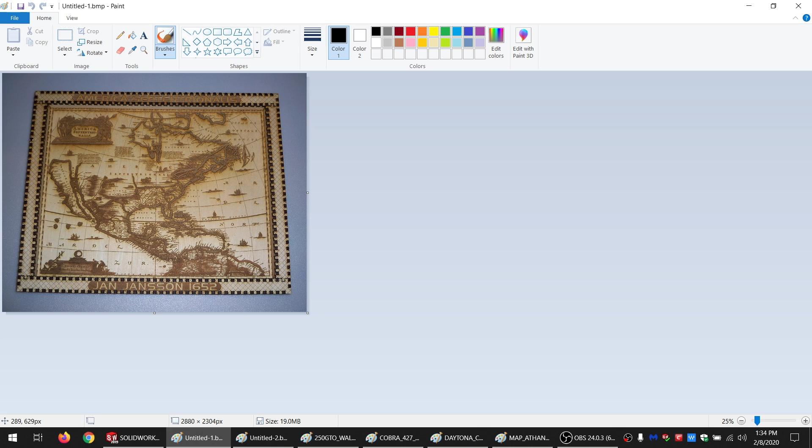Going to do something a little bit different. It's very much the same today. So on a previous video, I designed a picture frame basically, and made several of them. Basically, the idea was that I made a 3D picture frame out of flat pieces that was assembled, and then I engraved something in the middle. So I made 6 of them all together, and 4 of them came out looking just right.

2 of them, however, kind of bowed, and I figured out the reason for that is the centerpiece is relatively large. It doesn't get a whole lot of heat, all things considered. The side pieces are relatively small, and like this piece, it's just all heavily heated. And when I measured it, it actually shrunk a little bit because I dehydrated the wood, and the wood gets smaller when you dehydrate it.

Just the little bit it was, since everything was so tight, that was enough to make the thing bow, which is hardly ideal for something you're going to hang against a wall. So I came up with some ways to fix it, went back to the original file, and after I had implemented all of those, the file was absolutely huge. Doing a regen took like over an hour. And sometimes it would even fail to regen.

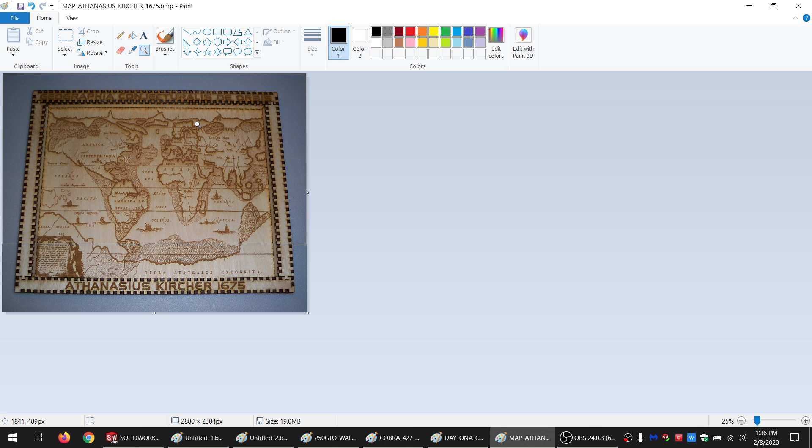It would and not even tell me about it. I'd look and I'd see that, hey, this thing didn't regen. I regen again, and then it regened right. But then I'm not even sure if it regened right. It just kind of looks more right now. Maybe it's still wrong because I wasn't alerted to the problem in the first place.

So basically, I decided there's so many problems with this, and I intend to make a good number of these. And I'm going to have to regen them pretty much every time because that's how wood is. So I just started over. I'm not going to show the process of doing that from start to finish because it was an incredibly long process, and quite frankly, a lot of things I had to try to keep in my head, and talking while I did that just wasn't going to work.

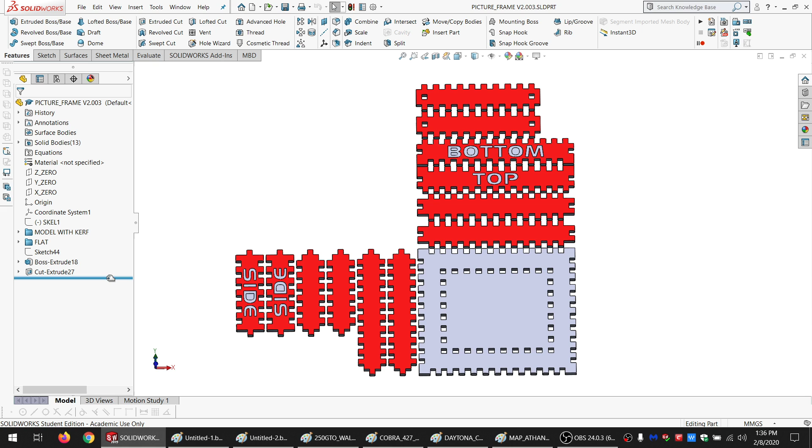So instead, what I'm going to show is I've got the completed part, and I'm going to go through the model tree and show what I did, just to give you an idea. Like, this is the same thing as we did before, but we're doing it in a different way. And that's one of the things that you run into a lot of times in CAD is you might have 5 or 6 different ways of doing something, and sometimes you just gotta choose between 2 of them that are equally good.

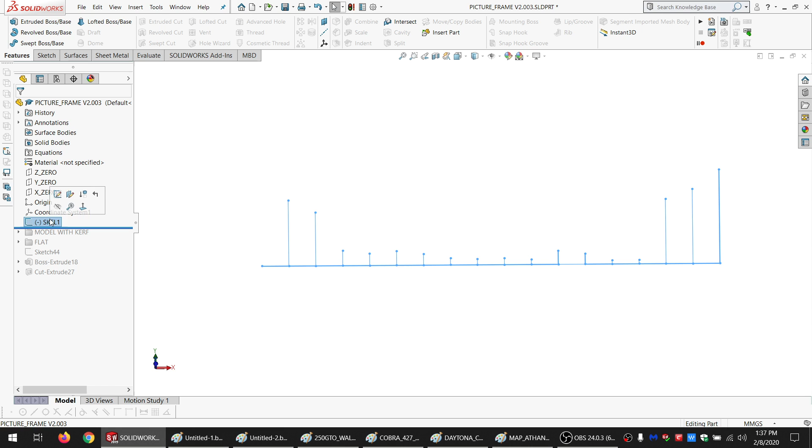Sometimes you got a couple options that are really bad, but they will work, and maybe you resort to them because the other methods are just causing errors for no reason. SolidWorks is my favorite CAD software. It seems to be the most reliable and capable of anything I've tried, but even then, it's far from perfect. So, I'll show you another method, and maybe you'll get an idea out of it anyway.

So the first sketch is SKEL1, basically the same as what we did in the last one. Basically, this is just a bunch of math. So ultimately, it gets us, you know, Y tooth wide. I've got X tooth wide. I've got the total X count teeth, same as before. So this isn't actually used to generate geometry directly. Basically, it's just used so I can say this feature that I'm making should be equal to this, or this divided by this, or something like that.

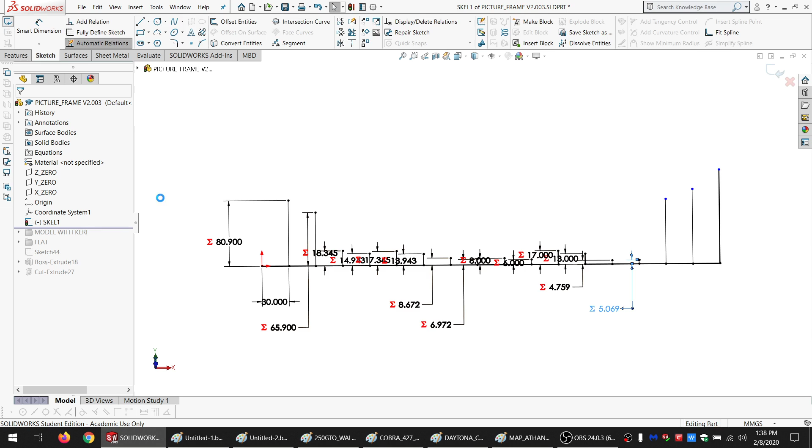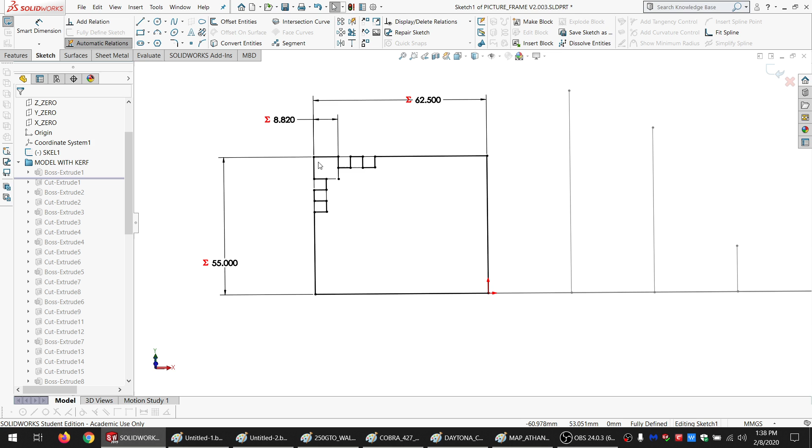And let me roll back here. So I went ahead and started with basically just making 1/4, the top left quarter of the back plate. And so I drew that up, and I already knew that this was going to be 2 times the material thickness, and then there was going to be 5 spots worth of material thickness width. So 1, 2, 3, 4, 5, 1, 2, 3, 4, 5. And so I went ahead and made the teeth also when I was doing that.

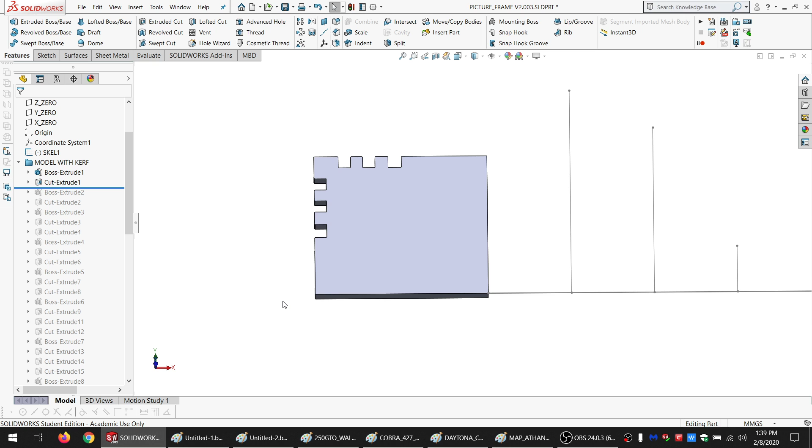And then these two teeth are made by this sketch, and that is based on the tooth thicknesses I generated here. So the first 5 width is where the border is going to be, so that's all done in just being equal to material thickness. Whereas these are calculated out because it's a longer run, so you don't notice if they're a little bit off because it's divided out amongst a lot of teeth, and that way I'm not restricted to having it a multiple of the material thickness. I can choose the width I actually want and let the number of teeth sort it out for me.

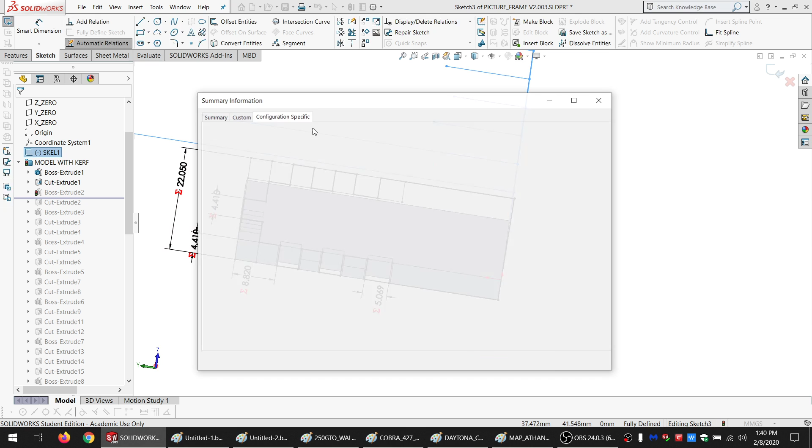And I only made the first tooth in the pattern, so that comes in important. So then I drew up the side one, and you'll notice there's a lot of equations here. And the reason for that is that nothing is really constrained to the geometry of this piece, or this body. It's all based on the original, the formulas from here, formulas from here, and there's a couple of constraints just to orient the whole body, but like the size of these teeth and the positioning of them, it's all based

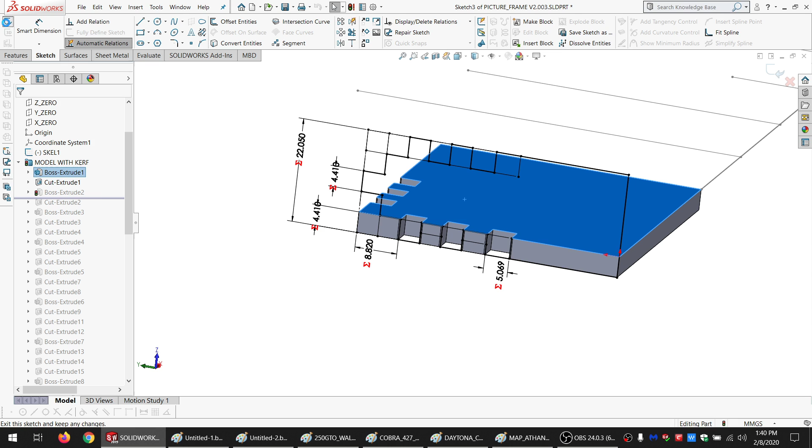right inside this sketch. And the reason I did that is because I don't want it to be dependent on this original part in case something changes. Not a huge deal at this point, but I wanted to get into that habit because it's going to be really important as we get more and more complex going forward. So then this sketch, this is just an extra cut, I believe. Okay, so this is the original just square basic.

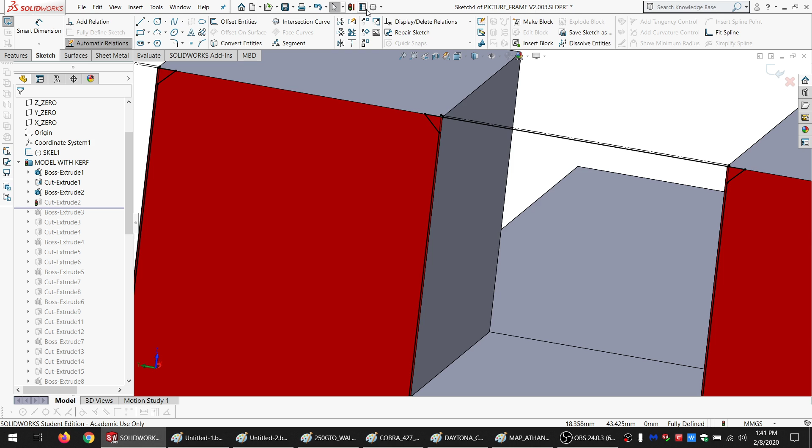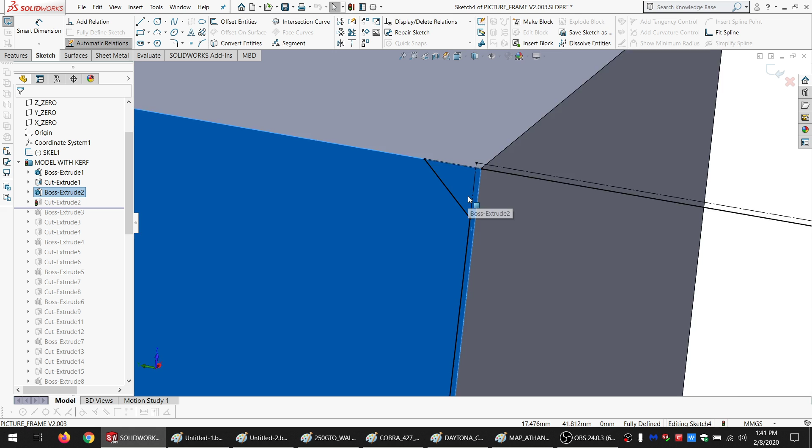And then this, what I did was, first of all, I added something that's called finger side space. So basically, I just wanted to be able to make the openings between the fingers a little bit larger. So again, if there's a little bit of shrink or swell in the wood, it doesn't cause the whole thing to bow. So basically, I made this section here that cuts a little bit off the side of the finger, and while I was at it, I also did the chamfer. And I just did that for all the existing teeth.

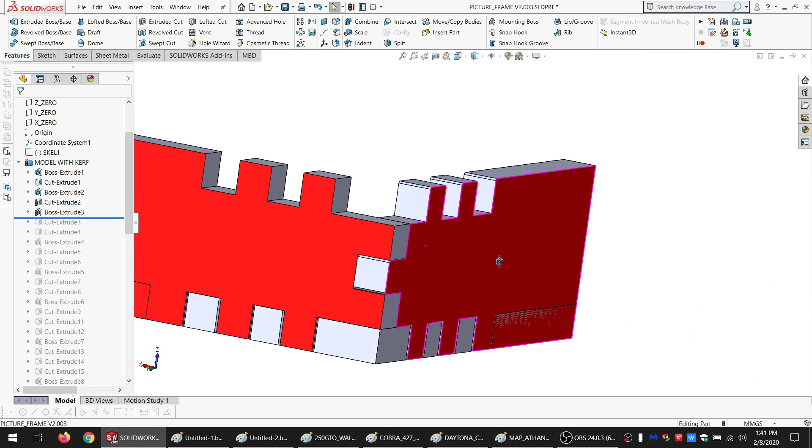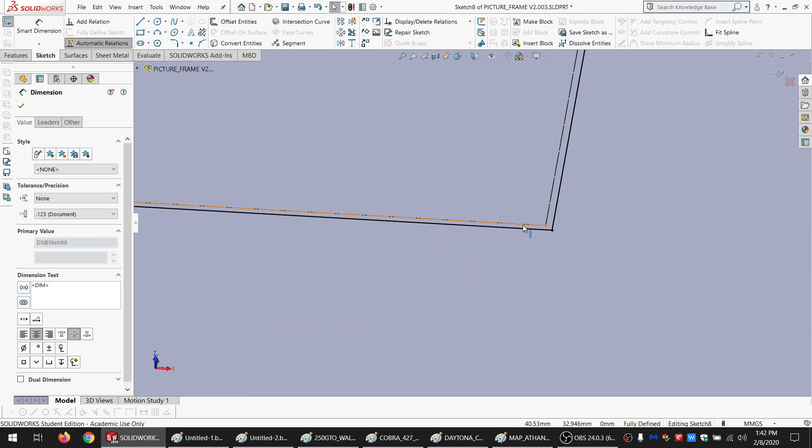And again, I only have the teeth that are material thickness, and then the first tooth that is based on the formula that's not material thickness. And then I do the same thing on the back. I make the back one, and then I add the offset and the chamfer. And let's see. Then here, let me hide these. I went ahead and made the first square, where the inside square here is where the square would be in theory. And then I offset it by,

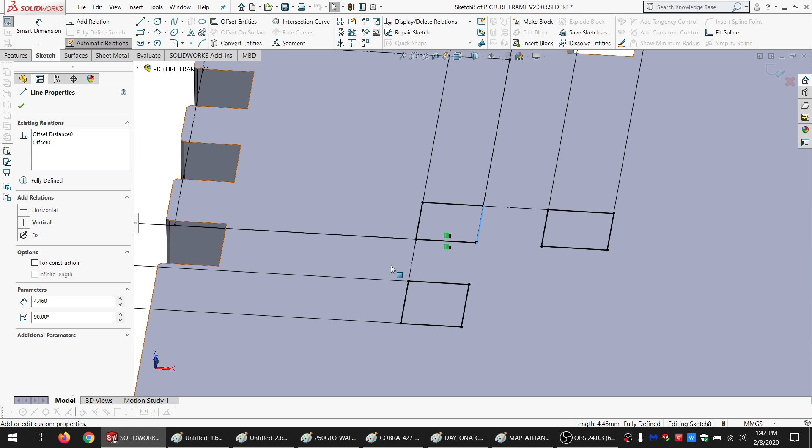again, by this finger side space, which is actually that divided by 4, because it's on either side, so that's divided by 2. And then that's applied not only to this, but also to the thing going into it. So it needs to be divided by 4. And every time I use this finger side space, I divide it by 4. So it's 0.025 in this case, but if I change it later, it'll adjust. And again, these are all located based on the math, as opposed to geometry. I think this I did a coincident on, and that was it. Everything else was based on math right here in the sketch.

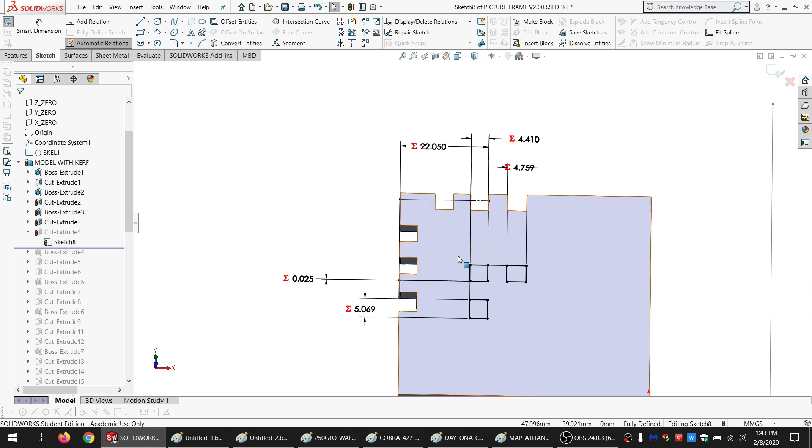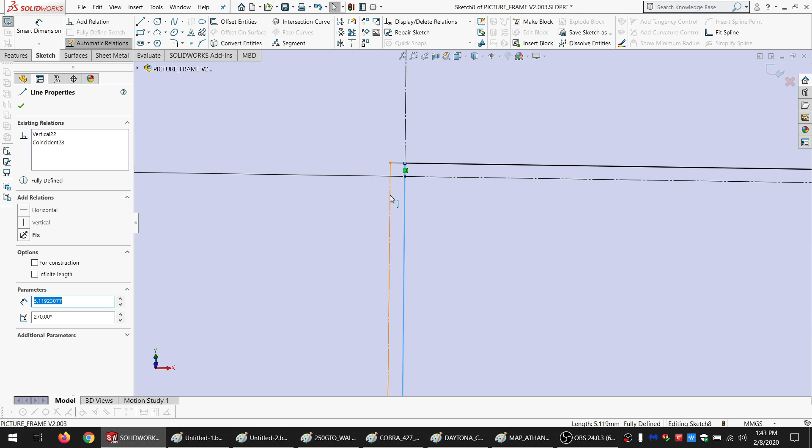So got this finger, then I went ahead and offset it. But you see in this one, since the piece of wood is going this way, I'm not too concerned about it expanding this way. I mean, it might, but if it does, that just makes it tighter in the hole. It doesn't cause it to warp the whole product. So the final piece that I made doesn't cut off this part, but it does cut off this section.

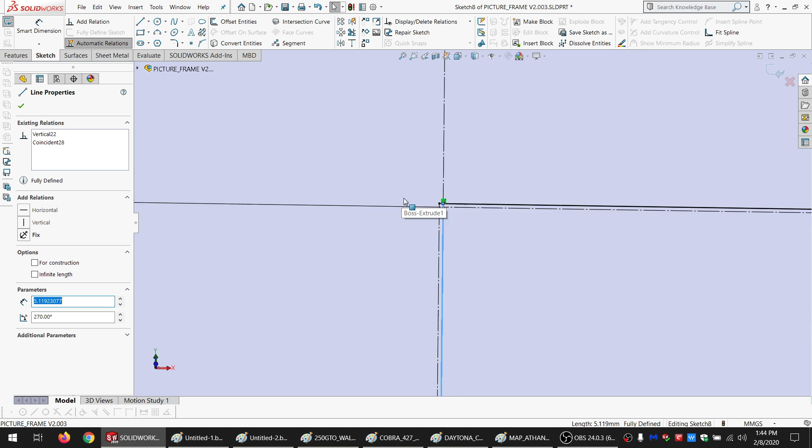And one other note is that on all these, I'm selecting the original rectangle, and then I'm offsetting it. And by doing that, I can constrain to it, and if something changes radically in size, it doesn't flip and go, oh, you want it to be this far away. Well, if it's down here, it's also this far away. By offsetting it, it's coincident to that. That's outside of it. And SolidWorks, when it regenerates, goes, okay, that's outside of it, it's coincident to that, and it doesn't end up backwards, which happens sometimes. It's not very common, but it does happen.

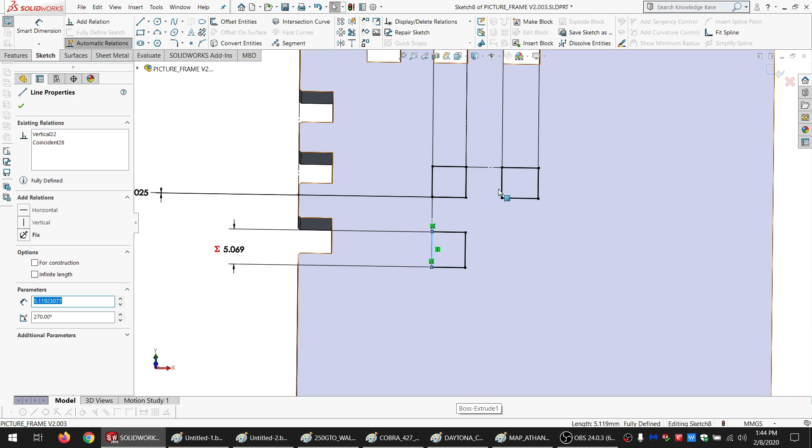And when you're dealing with things this small, you're likely not to notice it until you try to put it together, and then you've got to track down what happened because it's not going together. And basically the same deal in this direction, just a different formula, because this is the Y tooth width, this is the X tooth width, and then this is equal to that. Yeah, so, and also I just made the first tooth in the series again.

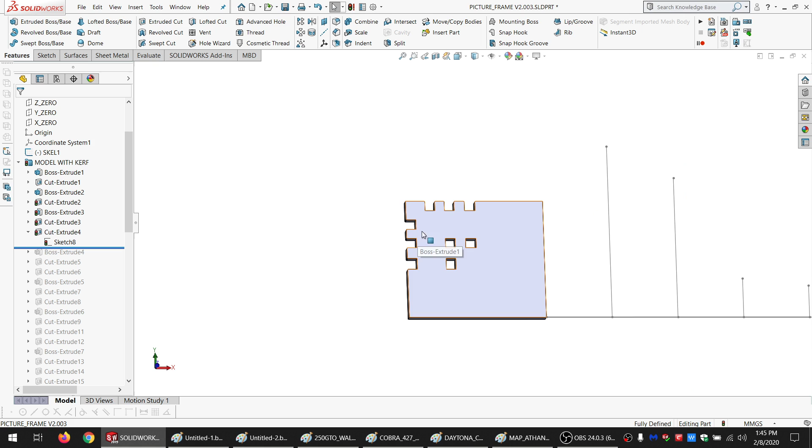And that'll be going throughout. I'm just going to be making the first tooth in the series. And the reason for that is if I was to make this whole pattern right away, then depending on how big it is, I might have an extra 100 faces or 200 faces, depending on how big I tell it to be. And then I've got another 200 faces here.

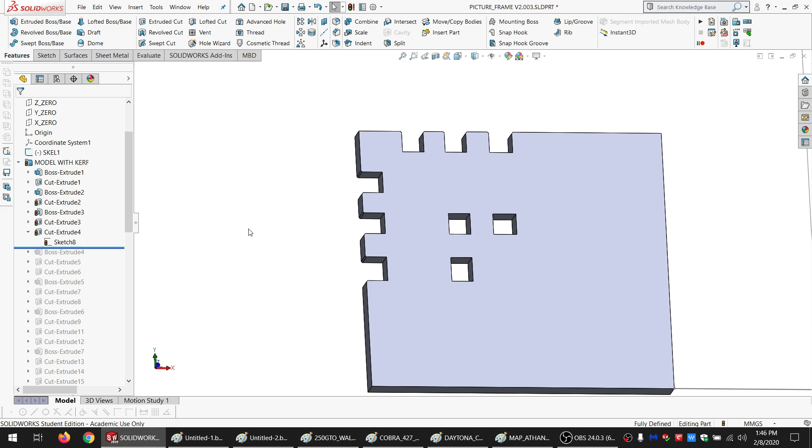So now I'm drawing this in the small size, and this is face, I don't know, 80. But then I regenerate the big size, and now face 80 is like here, and it throws everything for a loop. So basically what I'm drawing is always going to be there no matter what, and I'll worry about the generated stuff that might or might not be there afterwards. So, I'm going to show everything again.

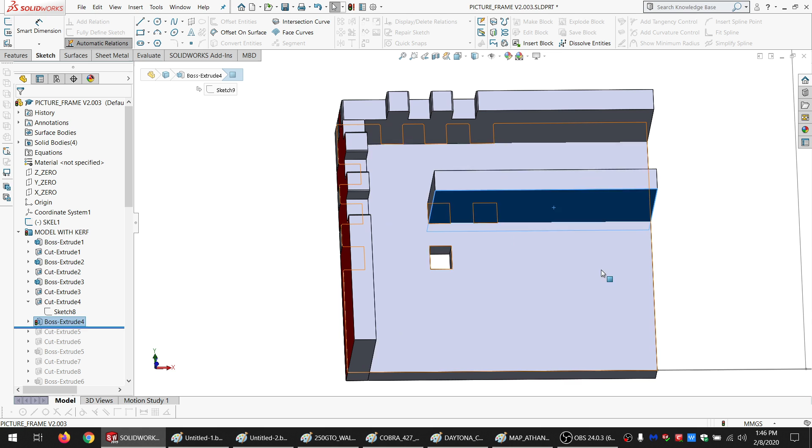All right, so here I just generate the inside border. And again, this was based on just geometry inside the sketch. It's not based on being attached to, say, these holes in here, because those wouldn't be very useful for this anyway, since they're already offset. And then I do a cut, basically for the spot between here and here. I just want to make that first cut. And if I hide this, you see I just get that first cut.

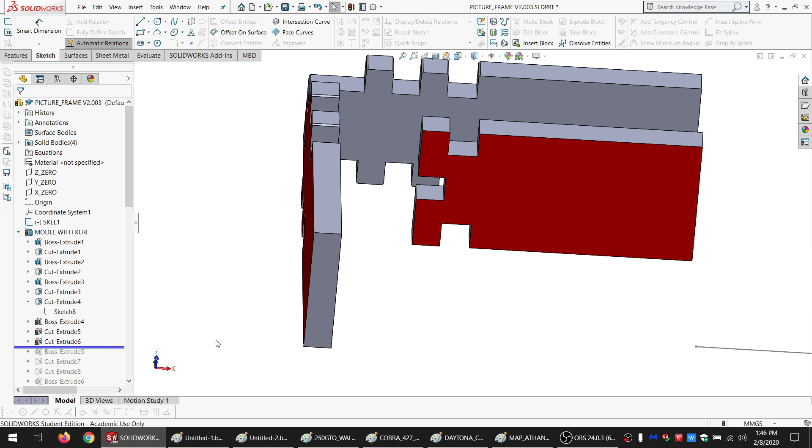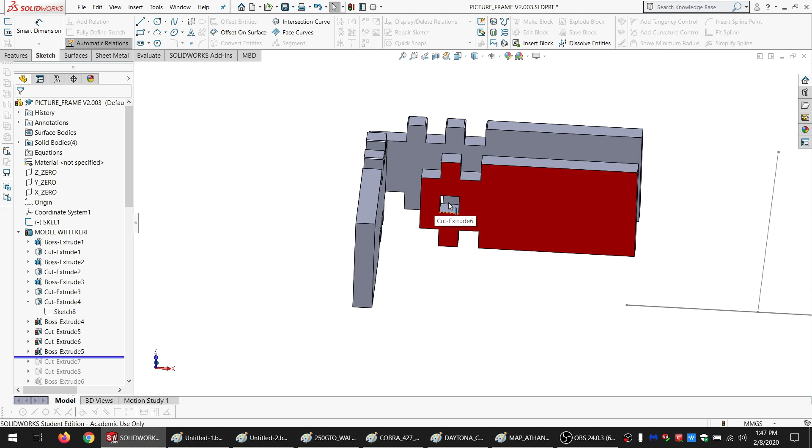And then I also need a cut for where the other piece that is going to be here will notch into it. And then I went ahead and added just a little bit extra material so it's actually going into a closed off hole, which if you can do that without showing it, it's a good idea. Sometimes it's worth doing even if you have to show it, because it makes something a little bit stronger and easier to assemble and all that.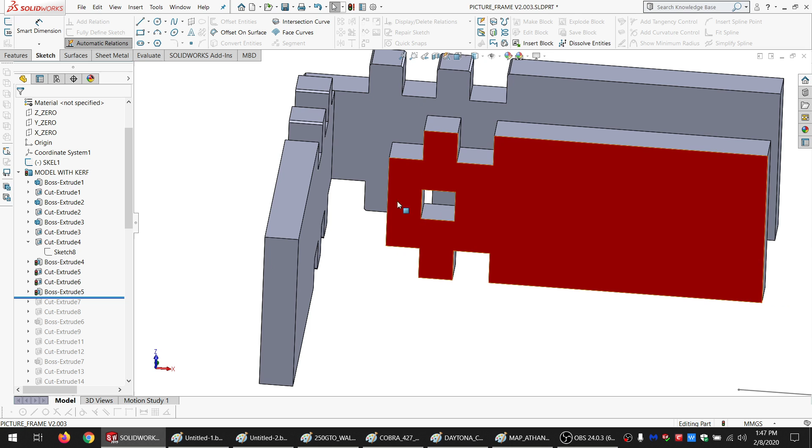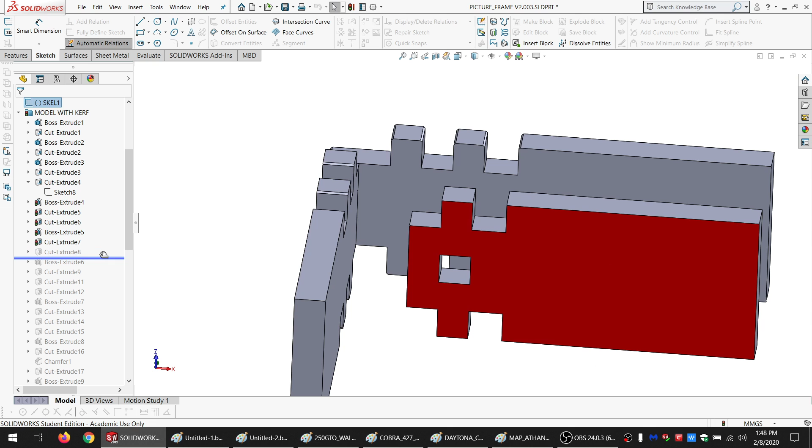In this case, I'm trying to make it look as presentable as possible. And I think in this particular design, having this on all the contact edges and closing in all the fingers would not be ideal. But since this won't be visible, I took the chance to use it. And here, you probably didn't even notice a difference, but I just cut that little bit extra off for the finger side space. And then I went ahead and made the chamfers.

And here I make the piece that's going to interact with that. This is just a rectangle at this point. And so then I cut a bunch of pieces out of it so that it's the basic theoretical shape before all the flourishes are added. And again, I just take little tiny cuts on here, and here, and here, and also here and here. And then I add chamfers.

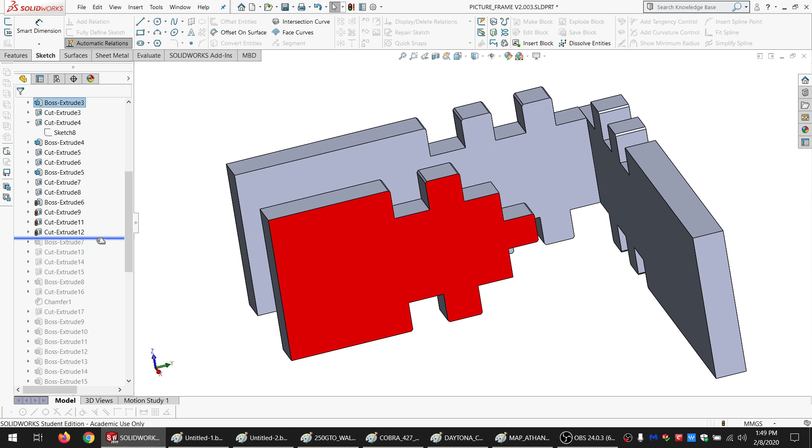Side note, I did the chamfers as a sketch. In this case, you could use the chamfer tool. It probably would have made more sense. I just wasn't thinking that way. Again, you can do things multiple ways, and sometimes the way that just comes to mind maybe isn't the most efficient, but it works. And again, just make a rectangle to get a good basic idea of what the piece is going to be cut out of, basically. And cut all these out.

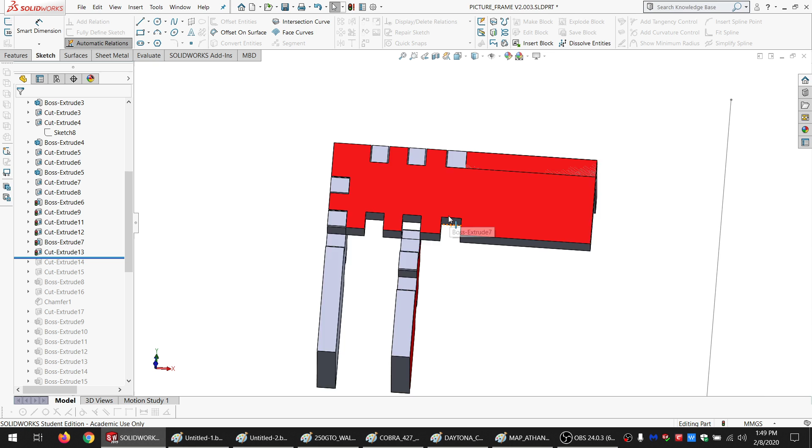So this whole section, these teeth are as wide as the material thickness and as deep. And then the first tooth here, well, the sixth tooth, but this is the first tooth of the pattern that will not be the material width. So my material width is 4.41 millimeters, and this first tooth is 4.759. Which on a small one, you'll get quite a variation like that. You know, we only have a few teeth to work with here.

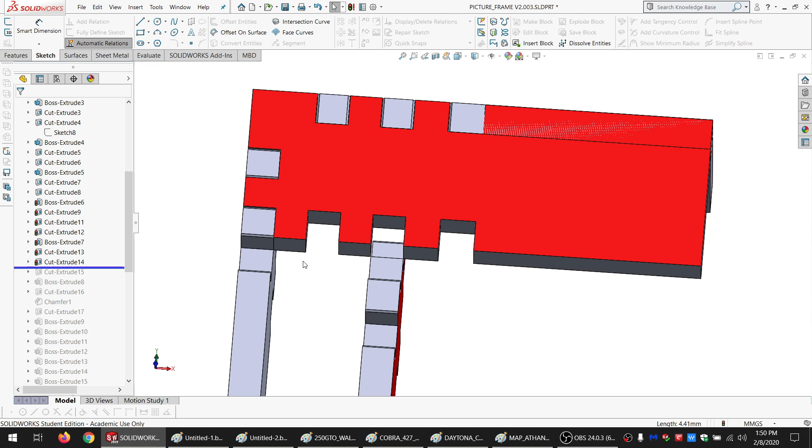When I'm making it larger, you know, it's got 40, 50, 62 teeth, that difference is much smaller. It goes from 4.4 to 4.759, whereas when it's a large size one, it might only go up to 4.5, and you'd be hard pressed to see a difference of 0.1 millimeters, especially in something wood. And let's see, this is just cutting off the extra tooth side distance, and then adding the chamfers.

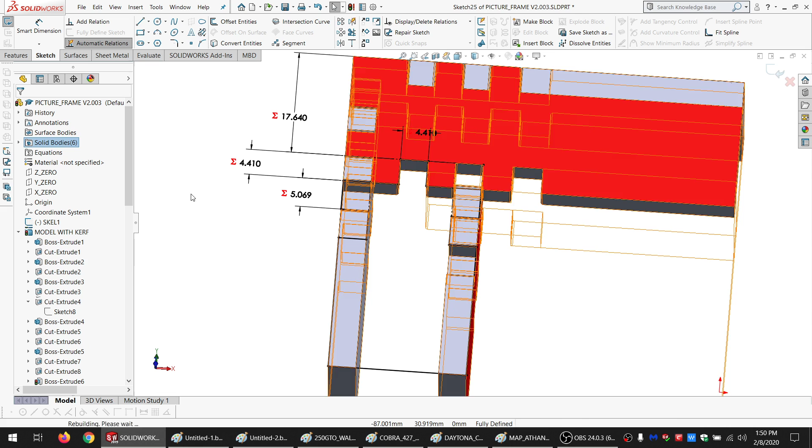And then I make this piece. I believe in this one I went ahead and did a little bit more than just make a rectangle. So if I hide everything else, yeah. So I did a little bit more than just making a rectangle in this piece. I made, you know, the basic design right away.

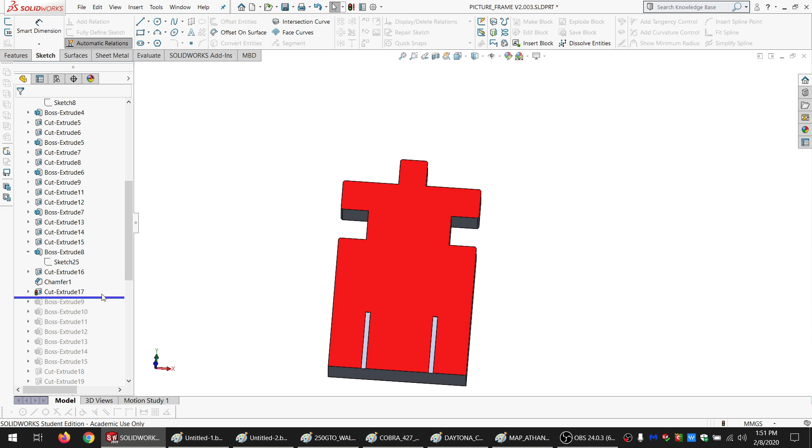And then I offset just a little bit on these. And by this point, I'd realized, oh wait, I can just use the chamfer tool, so I did, and it saves a little bit of time, obviously. And I need to show the rest of this.

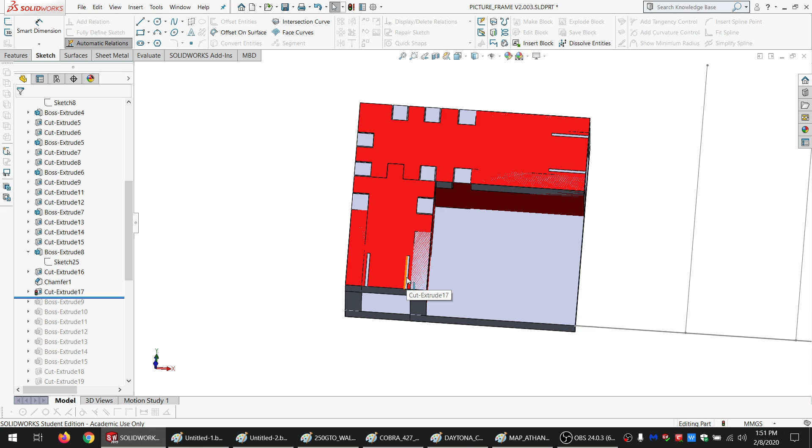So, highlighted in blue, you see 4 rectangles. These are the base of where I'm going to connect the text, which I can't put in yet. Partly because I only have a quarter of the thing, and partly because if I put in the text before the very last step, it's going to add a whole bunch of extra faces, and that's going to cause problems in other features down the line. So I just wanted to put something that I could anchor the text to later.

So what I did is I just put in these. I made a rectangle here, another rectangle here, and I made this equal to the text height that I'm using, which is right in here, text tall. And I also have this text base offset. With some fonts, the bottom of the font will be right touching the line that you draw it on. Sometimes they'll be above, sometimes they'll be below. Most often they're either right on the line or above, though.

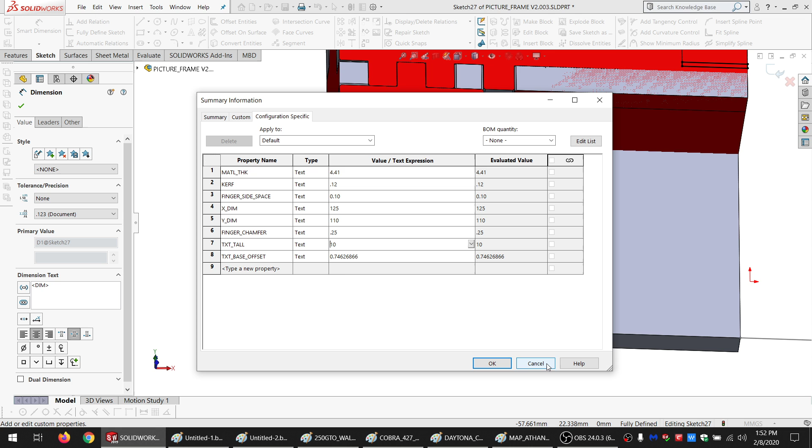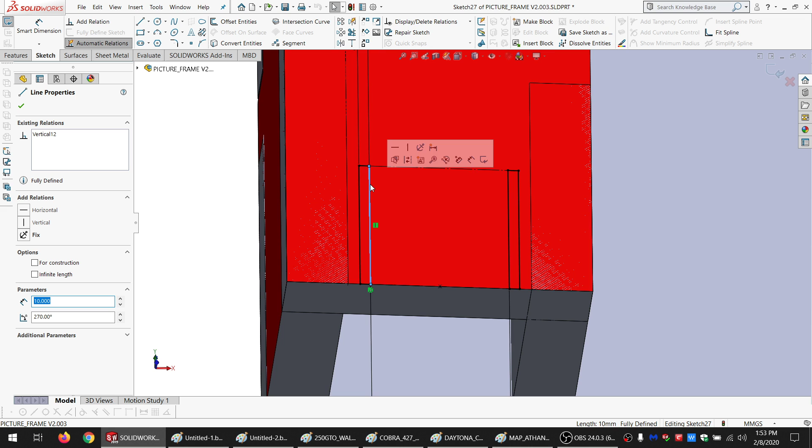The particular font I am using here, at 10 millimeters tall, is this far above the line you draw it on. That changes depending on the height, but I'm using 10 millimeter tall, so it's always that far above. So I made this rectangle as the ideal spot that I want the text to be in, and then I made rectangles to the side, so if I base the text here, the bottom of the text that you'll actually see will be right there. And I did the same thing here.

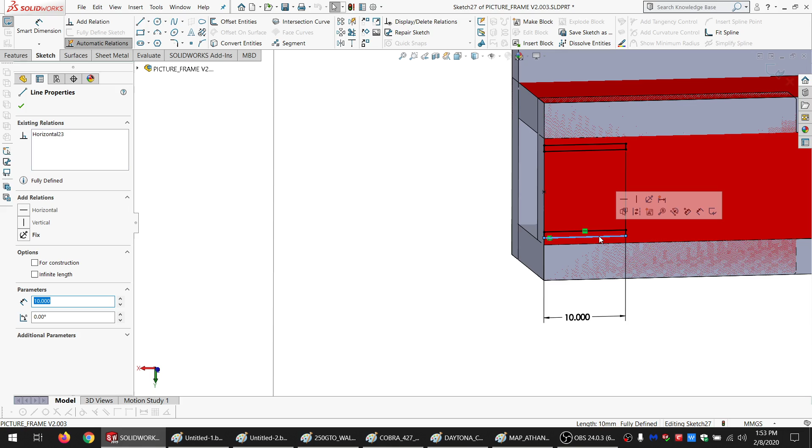If I start writing text using this line, the actual bottom of the text that you see will be on this line, and the top of the text will be on this line. And if I flip this thing upside down and I want to start text here and have this the top of it, I basically just got the same thing that I can work on. So I can base text here, the bottom will be here, the top will be here.

And so yeah, I just put those in. I could have put them in later, but I thought of it at the time, so I did it. Sometimes I do that. Let's see. What's this one do?

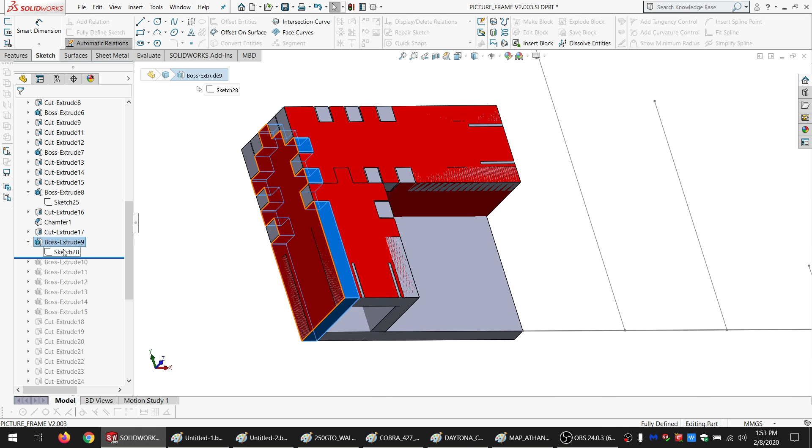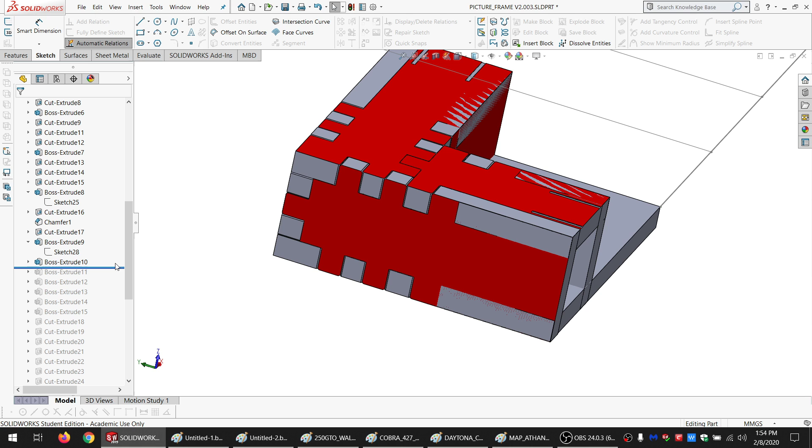All right, so this is actually kerf already. Even though I've got less than a quarter done because I don't even have these teeth, I figure might as well do the kerf offset early on, when there's fewer things to worry about, so there's less for it to have to process. So I did the kerf there, I did it there, and scroll down a few, did it in that piece, on that piece,

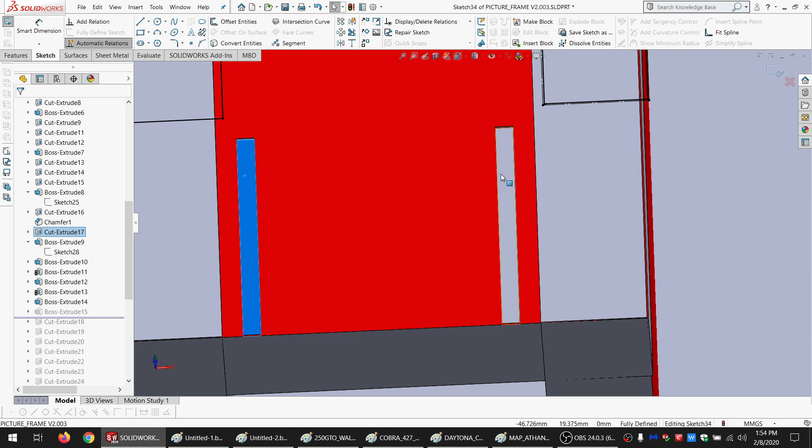and this piece, and then this piece was a little bit more, because all of these I just offset the face, and it was nice and easy. Only difference is that when I did these, after offsetting the face, I also had to do a convert entities on these so that they wouldn't get covered up. On this one, let me hide all the others. Oh, I should have kept that and hidden this.

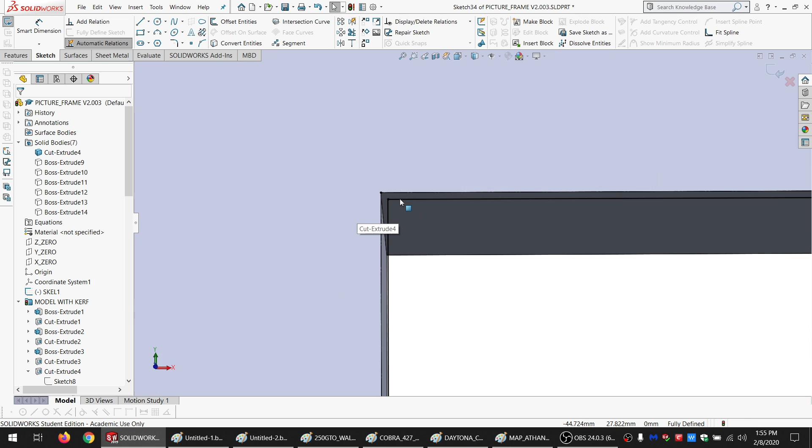All right. So on this one, in addition to doing the offset face, I also had to offset these. So I offset these in, and these are just construction lines. And then I offset the outside out. So basically when I did the extrude boss here, it just completely overwrites the existing piece that had been there. And let me show everything again.

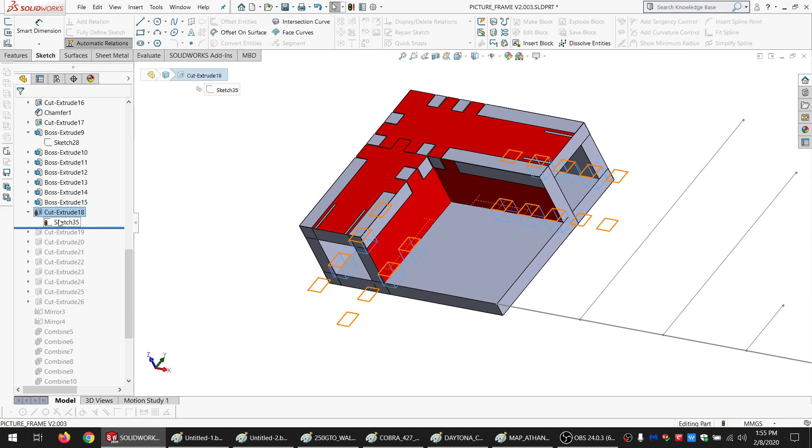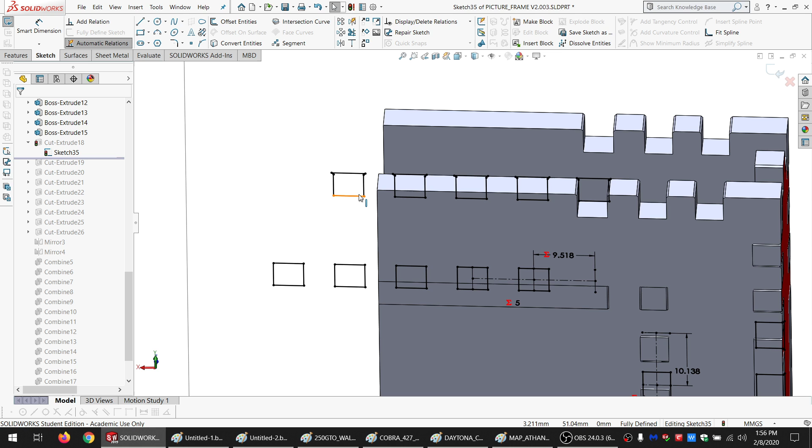So at this point, I'm actually starting to work with the patterns. This is the first place that I'm actually starting to use patterns. We're a good ways down the tree, so anything I do in here isn't going to mess with it. And I'm basically at the end of the process, other than doing the patterns, so I do the patterns here to cut all these teeth going forward, and also this way.

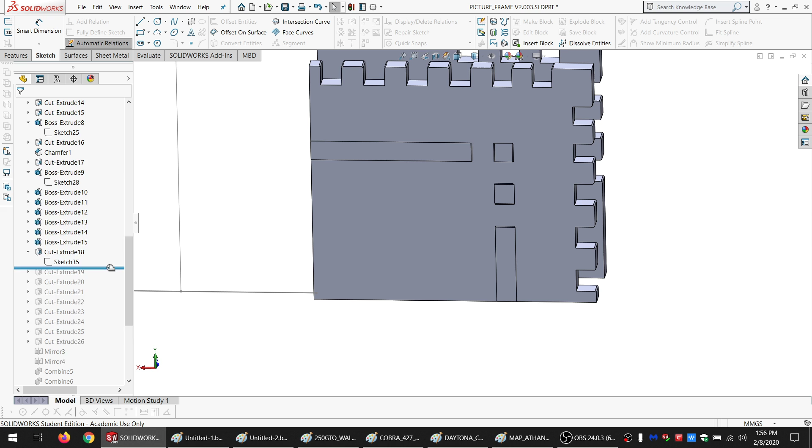So let me show this again. This sketch is basically before I do the tooth cut, and then I've got my teeth cut. And this looks a little bit wrong because it's half a tooth. It'll look right once it's all sorted. It's fine. And let me show everything again.

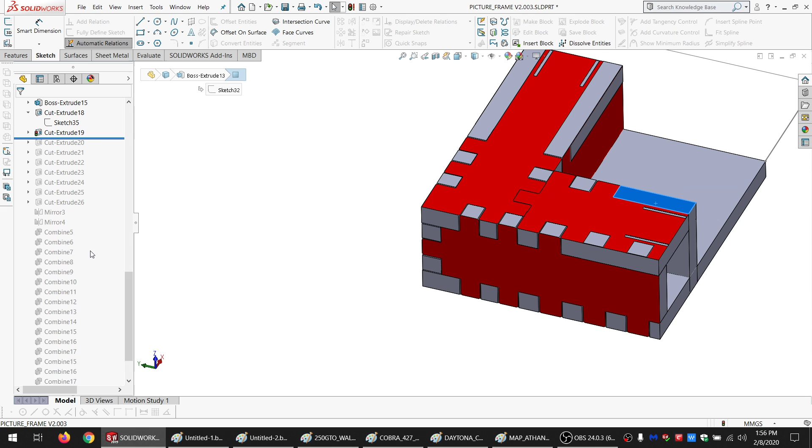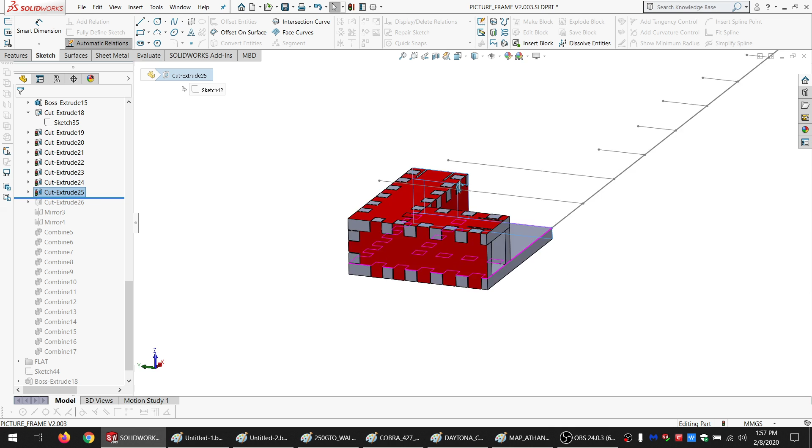So then this is the teeth for this one. So if I get this out of the way, now it's got teeth all the way down, whereas this back one didn't. And teeth back there, teeth up front, teeth there, and teeth there. Just keep adding teeth there, and let's see. Okay, so now I've got teeth patterns on all of them.

Which at this point I've got to be real careful, because as I change this, if I make this twice as wide, I'm going to have like twice as many faces. Things get real messy real fast. So what this sketch is, I just sketched right on one of my original planes. I made a big circle. I constrained it to the origin, which is right here. I just gave it a huge size. I made it 2,000 millimeters in diameter, which is big enough to cut any size thing that I would make that would actually fit on my laser cutter.

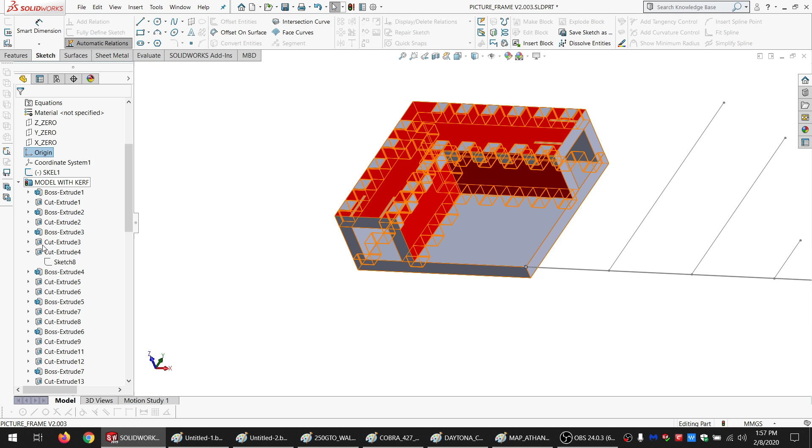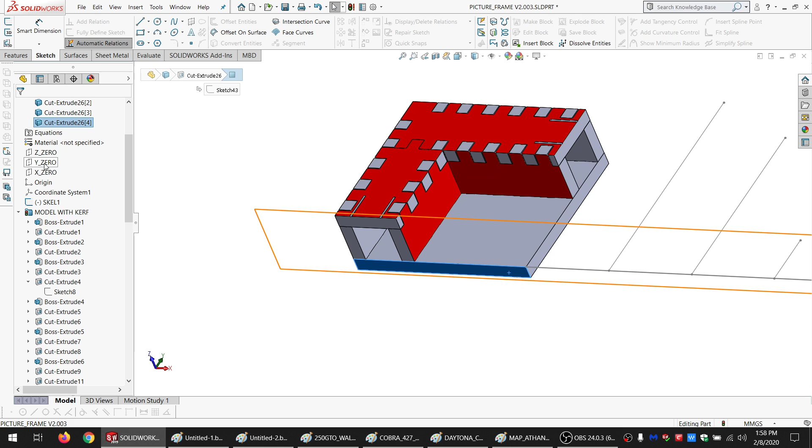And I guess if I really needed to do something bigger that was on a bigger laser cutter, I could just make that circle larger. But 2 meters across, even being generous, worst case scenario, that's a part that's like a meter across. It's pretty big for a picture frame. And here too. So basically I made a circle here and a circle here, except they weren't actually on these planes. They were on the original planes. And I just cut off a tiny little sliver that we had extra from doing the kerf, because I don't want that extra for the next step.

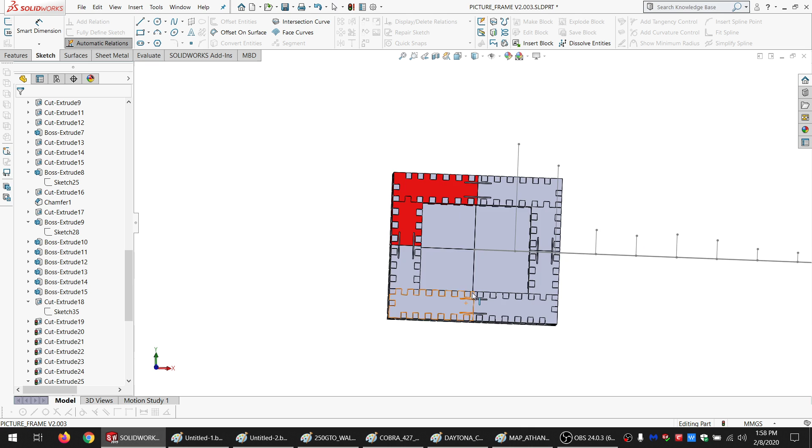And the next step is this. I mirrored it across that same plane that I used to cut, and then I mirror all that again. So right there in 2 steps, we go from having a quarter to having the whole thing, although it's cut up into pieces. Like this back piece is 4 pieces, and all the other pieces are 2 pieces. So at that point, we do a whole bunch of combines. Combine this with this, this with this, and so on and so forth, so that all our pieces that are cut up into 2 or 4 pieces are now singular pieces.

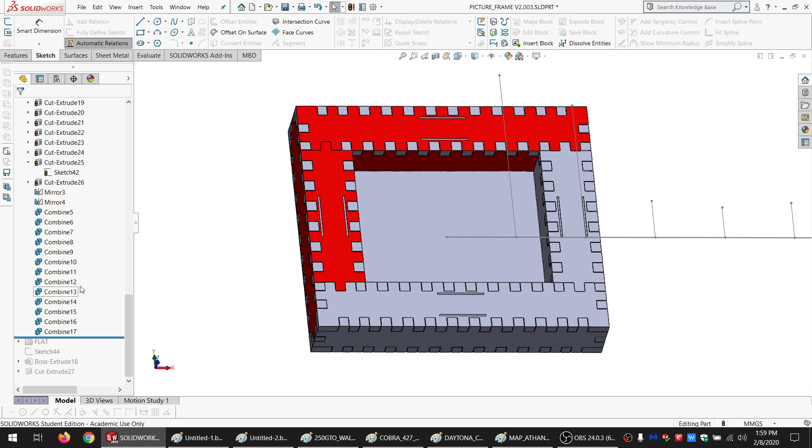And at this point, I've got it completed. I can hide this original sketch, and I can move pieces so that they're flat, so that when I export this to my laser cutter, I don't have to worry about them being in wrong orientations, because it can't cut them in the wrong orientation. It has to be looking at them just like this.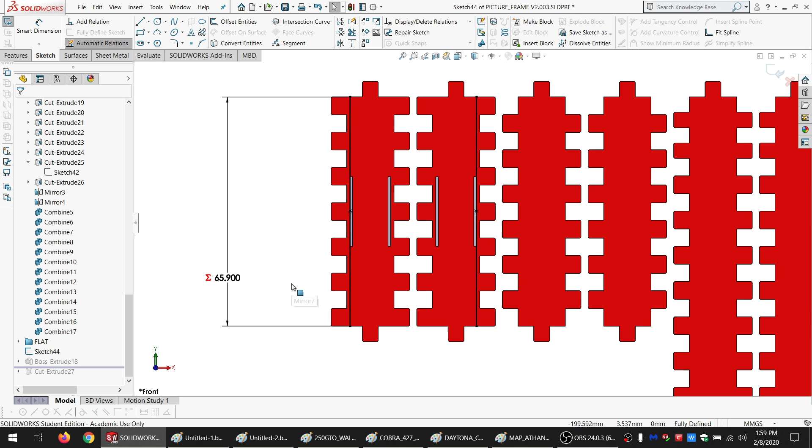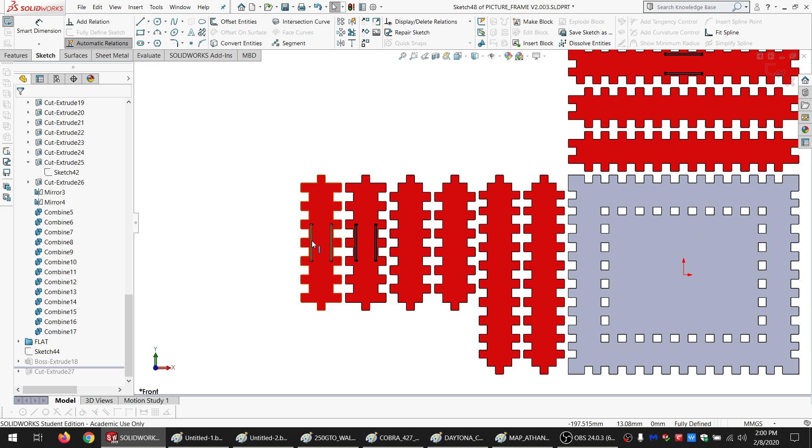And then from there, I first make a sketch, again basing it off of these rectangles that I had made before, and I don't actually cut any text with this sketch. All I want to do is make the lines that I can put the text on later, because the next process is just to make little bits to fill in those squares. I just want to fill those in so that when I export, I don't see those squares at all. And then the final thing in the entire part is the actual text, which all I did here was I selected this sketch, I select convert entities, and then I could base this text on top of that.

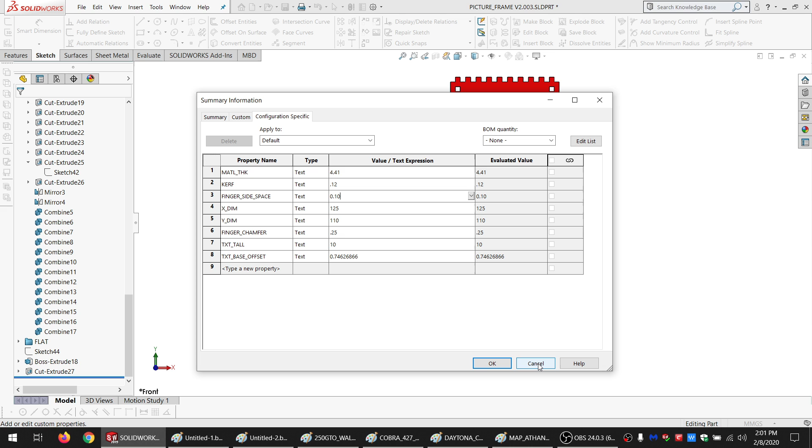So that's the final everything involved. I've still got a little bit of fine tuning to do with my settings. For instance, when I first did this, I did my finger side space as 0.20, because I figured worst case scenario I'll use a lot of glue. And I used a lot of glue, so I'm gonna try it maybe at 0.10 and see what happens there. But it did go together, and there's no bowing, and I don't have to worry about it bowing over time. So I'd call that a win, even at my worst case scenario there.

So that's basically what I wanted to share today. Again, lots of different ways to approach things. Sometimes the most obvious way is not the best, or it may have problems that you wouldn't have even considered before. But just for an idea, the original one that I designed took over an hour to regen. So I'm going to click Control Q right now, and it's just gonna be spinning there, and it's done regenning. So that gives you an idea of the difference.